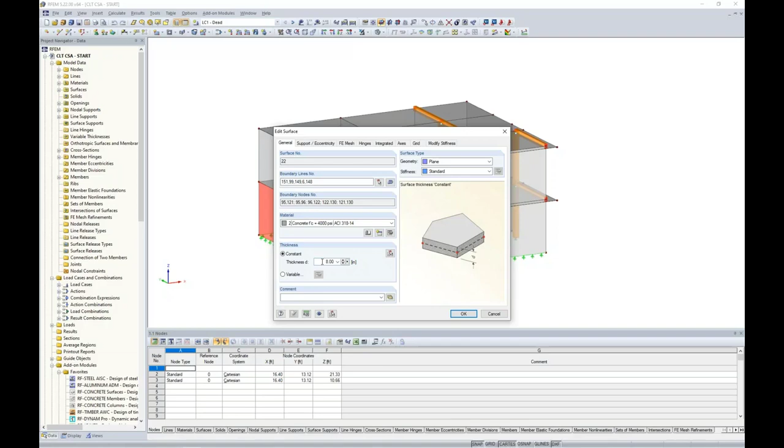If we click on any one of these panels, you'll see here that the material was defined with concrete. With the process of modeling a CLT structure within the main program first, we just need a simple placeholder for all of these panels. Concrete, wood, steel - it doesn't matter, as well as the thickness doesn't matter, because eventually within the RF-LAMINATE add-on module, we're going to override this material with our true CLT composition details. So for now, we just have our placeholder here of concrete.

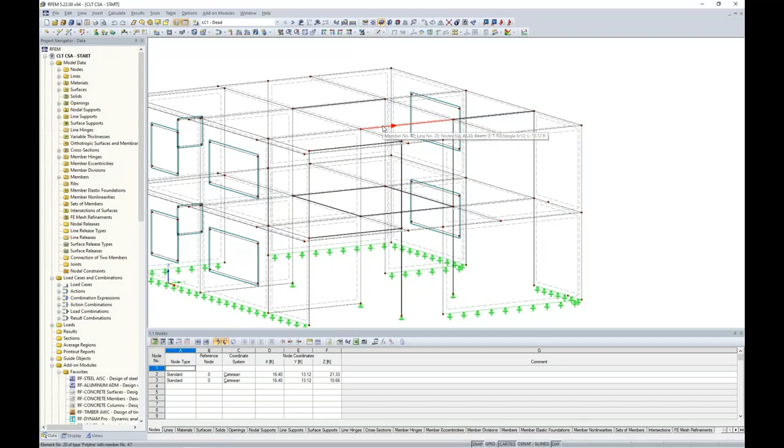You'll also notice that I have some beam members within the program as well as columns. These are just typical glulam members. For example, we have these beams here that will be holding up certain portions of our CLT ceiling up at the roof. What you'll find when we turn this into wireframe view is that 1D members are represented by 1D line elements. Inevitably when we turn this into the rendered version here, you can see that the center line of the beams lines up with the center lines of the CLT panels, when in fact we'd actually like to drop these glulam beams below the CLT panels.

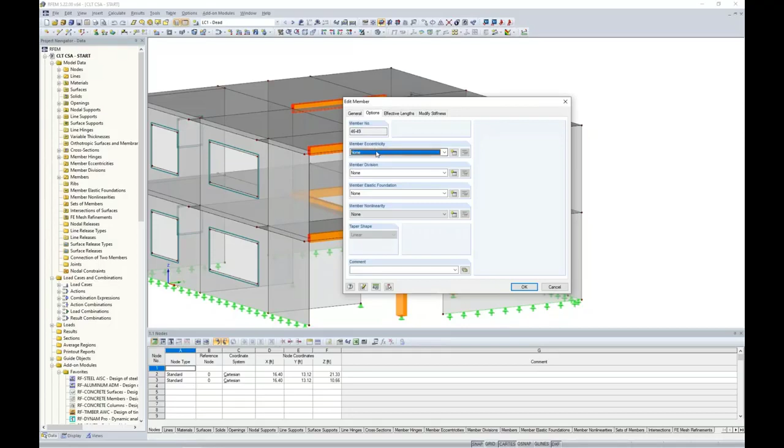We can do this by applying a new eccentricity. How I can do this is to select all of these members at my roof level. We can right click to edit the member. Under the second tab here, I have options where I can define a new member eccentricity. I could go ahead and manually type in the eccentricity distance. I'd like to drop this beam below the panel by considering half the depth of the beam as well as half the thickness of the panel.

But the problem is that if we make any changes to the panel thickness or the size of the beam, I'll have to go in here and manually adjust that eccentricity distance again. So rather, it's useful to use this automatic option here where we can line up the top of the member and offset it from the bottom point of a surface. So I can choose the top of the beam, and I can graphically choose any surface at my roof level - we'll choose surface number 63, and I'll choose the bottom point of that surface. Now when I click OK through these dialog boxes, you can see those beams now drop below the panels.

Now the benefit of this is that when we go in and we adjust the true CLT properties, the thickness will be changed from what we currently have modeled, but that eccentricity distance will automatically be adjusted.

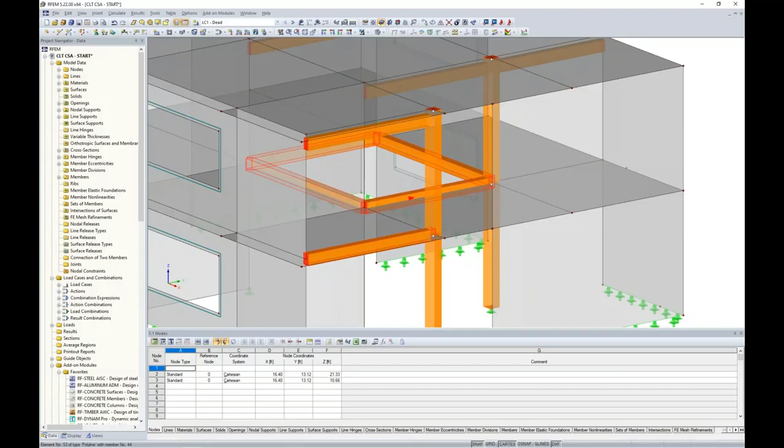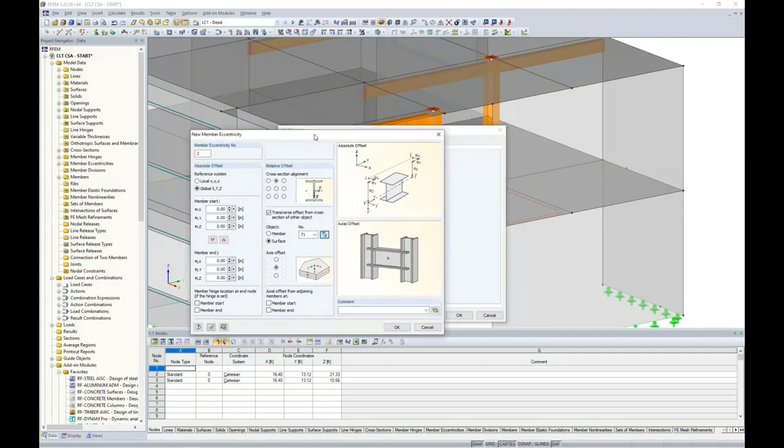Now we want to do the same thing at the first level. I'm going to hold down my control key to highlight all my beam members at this level, and double click to activate this edit member dialog box. We create a new member eccentricity, taking the top point of the beam and offsetting it from a surface, but this time choosing a surface at this first level, surface number 71. We choose the bottom point of that surface, click OK, and now you can see those beams were dropped below those panels as well.

Okay, so essentially the basic geometry is complete.

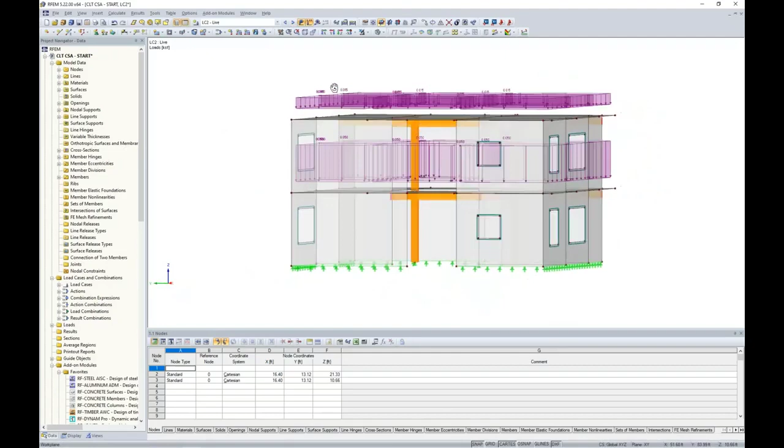I did want to show that I have applied a few loads to the structure. You can see here my dead load, if we activate the loads graphically, just simple surface loads on both the roof and the first level. We can take a look at live load, exact same concept, maybe just adjusted magnitudes. A snow load, which is just activated on the roof level, and then a simple lateral load for wind, applied in the global Y direction here.

So when you first create a model, I'm going to reactivate this dialog box by right-clicking on my model name and going to General Data. When we first create the model, or go back into it as I just showed you, the load combinations will automatically be created according to the standard selected within this drop-down box. So you can see here the NBC 2015 was selected. We also have ASCE 7 2016, as well as many other international codes, including the Eurocode. When this checkbox is checked, those load combinations will automatically be considered by the standard selected within this dropdown. If we uncheck this, we can manually create our load combinations and this standard will be ignored.

So taking advantage of the NBC 2015 for today, I can launch my load cases and combinations dialog box, and once again we can see our simple load cases defined here. Under the combination expressions, the program automatically generates my strength load combinations per the NBC 2015, as well as my serviceability load combinations. If I'm curious to see what those are according to the standard, I can click my info button here to see the load combinations directly from the code.

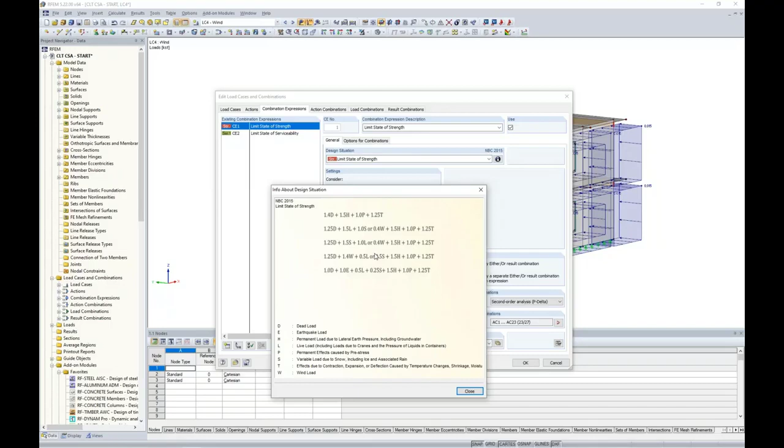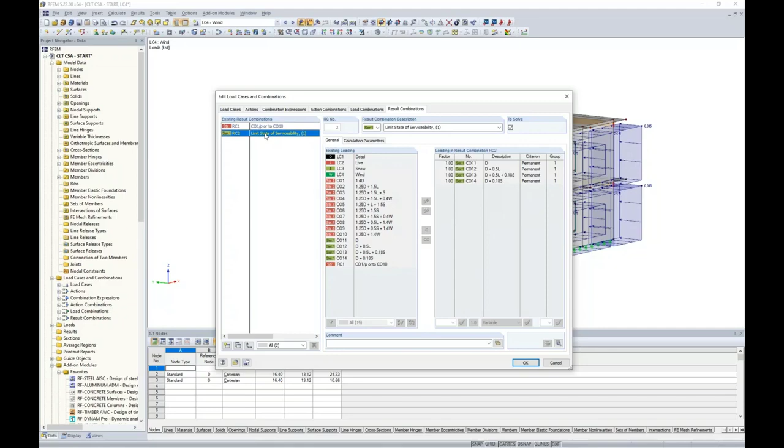Now, most importantly might be the load combinations tab, where we can see these load combinations listed out individually for strength as well as serviceability. This is based only on the load cases I've defined under that first tab, which includes dead, live, snow, and wind. Now, all load combinations are calculated according to a second order analysis by default, considering both result combinations here, and that would be available on the next tab. A result combination is nothing more than an envelope solution. So it will consider all of the strength load combinations here on the right-hand side and give us the max and min for deflections, internal forces, support reactions. Same thing with the serviceability result combination as well.

So now that we have those load combinations defined, we can view them here graphically, which will include all the dead, live, wind, and snow load shown on the structure here.

And you would think that, okay, we must be fairly close to running an analysis, but remember we still have all of these concrete panels defined here rather than our true CLT panels.

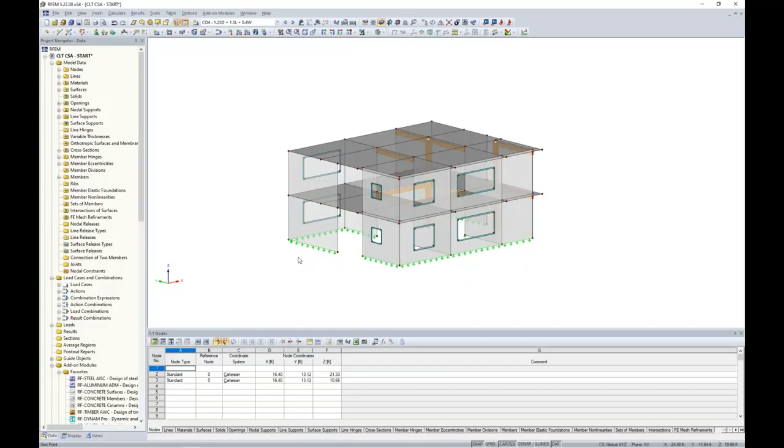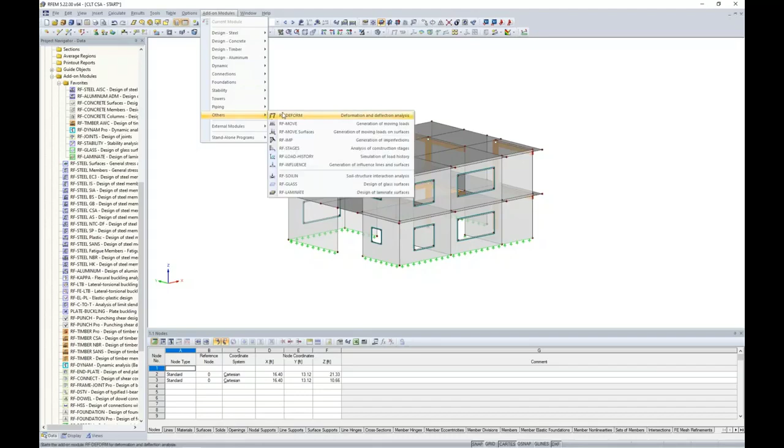So this is where we want to launch the add-on module RF-LAMINATE. The add-on modules can be found within the project navigator over here on the left, and you can see this long list of add-on modules. This is why we have the concept of only paying for the modules that you need, keeping the cost down for the software as well as catering to your specific projects. So we can launch RF-LAMINATE here. The add-on modules are also available within this drop-down box at the top, and we can find RF-LAMINATE under Others. So when I say add-on module, it's nothing more than just this simple dialog box that pops up within our main program RFEM here.

So let us jump back to the PowerPoint to discuss exactly how this add-on module is working with our main program RFEM.

Pretty soon we will go ahead and define the individual layers for our CLT compositions. Each individual layer has its own stiffness matrix based on the modulus of elasticity and the shear modulus, and we can see a simple example of a single layer stiffness matrix here.

So what this add-on module is going to do for us is consider all layers together to create a much more global stiffness matrix for the panel itself. You can see here an example of the D11 entry for a single panel.

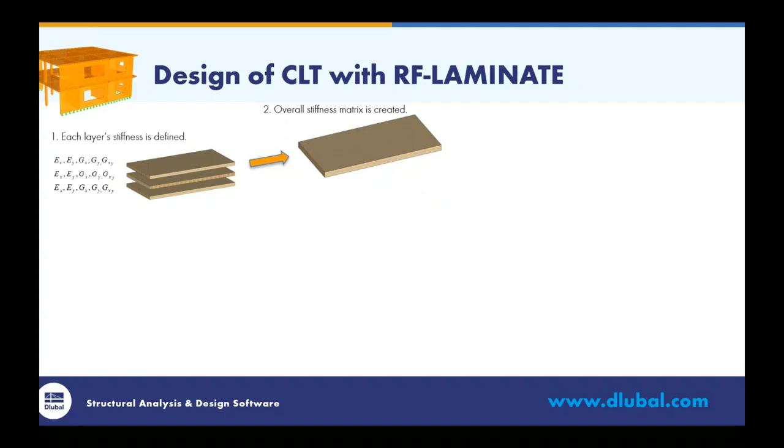Now we're going to take this overall stiffness matrix and export it back out to RFEM. So instead of seeing those concrete surfaces, we'll now see the true stiffness of these CLT compositions exported back out to the structure. We can run our analysis to determine the internal forces on these panels.

We're going to take these internal forces from the main program RFEM and bring them back into the add-on module, RF-LAMINATE. The stresses are going to be distributed to each individual layer of the CLT composition, and a stress distribution for a cross-section of the panel might look something similar to this.

Even furthermore, when we take these stresses and distribute them to each layer, we're going to separate them into tension, compression, bending, shear, and even torsion components. We're going to check these stresses in comparison to the design strength set forth by the material, as well as taking into consideration the CSA standard, to eventually give us a stress design ratio.

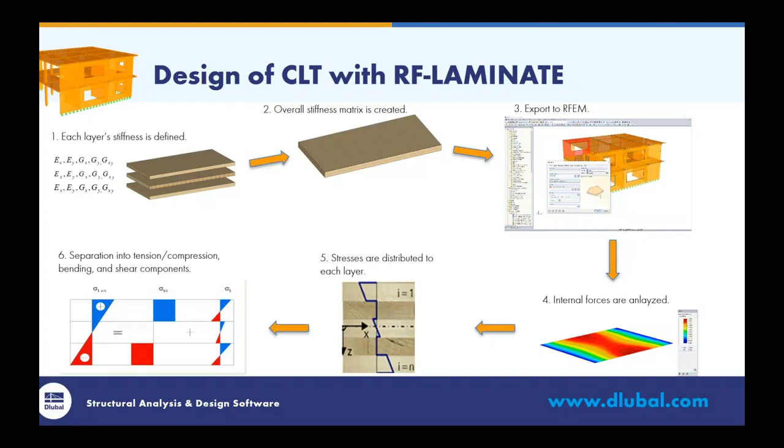So that's what's going on behind the scenes, and that's why we want to take advantage of this add-on module for CLT. The first thing to do within this add-on module is choose our standard. You'll notice we've just added the CSA O86, so this is the standard we want to take advantage of within the module today. We also have the NDS, both 2018 and 2015, as well as European standards.

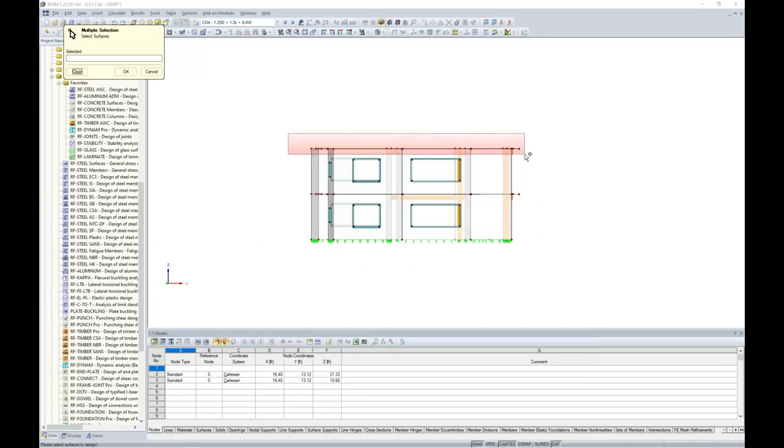We want to select the surfaces we're interested in designing. So for today, perhaps I'm only interested in the top roof panels, so I can graphically select those, as well as a few wall panels here. I'm not designing all of the surfaces, only these few that I've selected here.

As far as the ultimate limit state, I want to choose all of my strength load combinations and move them over to the right so they'll be considered for design. Then I have my serviceability limit state, where I'm going to choose my serviceability load combinations from the NBC 2015 and move them over to the right-hand side.

Keep in mind, all this information for our load combinations was brought in from the main program RFEM. I don't need to redefine any of this. Then we simply move down the list over here on the left.

So the next table here is our material characteristics for our CLT compositions. I want to rename our first composition to floors.

Now what I can also do is select the surfaces I would like to assign this composition to. Remember, everything is defined as concrete right now in our main program. So for our floors, maybe we select the roof panels, and we also select the first level here. Now this composition will be assigned to all of these surfaces listed here.

We also have the ability, if you'd like, to change the color. By default the color is blue, but maybe we want to change it to more of a wood color. We can change that here, including the texture.

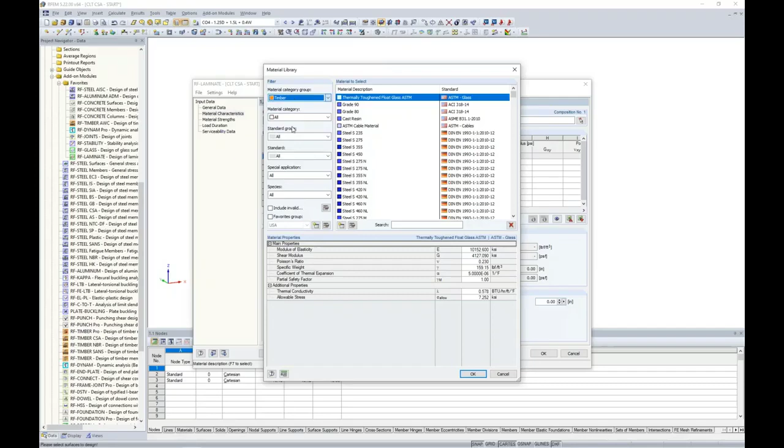Over on the left, I can filter to timber, filter to wood North America, and underneath this we have both the AWC and the CSA. So all materials are available from the CSA standard. If we choose any arbitrary material, we can see the material properties presented to us here.

We click OK and give our first layer a thickness, so maybe 1.5 inches, and the first direction would be 0 degrees. You can see all the material properties are also listed within this table. Our second layer would be defined in a similar manner. We can choose that same material if we'd like, keep the same thickness, but this time the second layer would be oriented at 90 degrees.

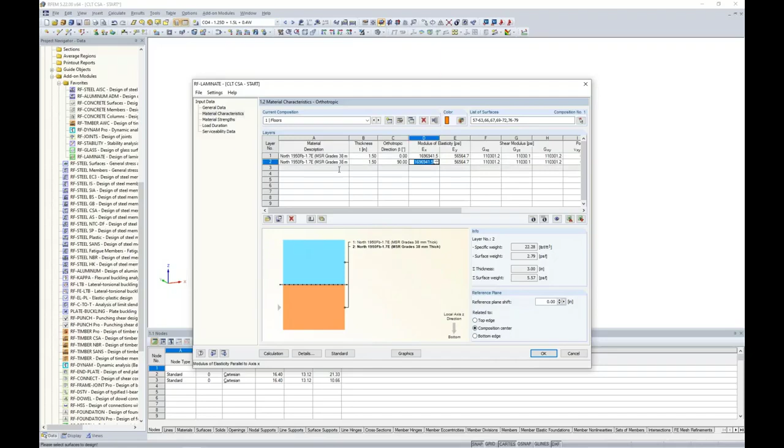This is relative to the local x-axis, which we'll get into later. Once you create your custom layups, you have the ability to save them into the library and open them up for a future model.

We also have the ability to take advantage of imported layers from our library. When I activate this option, the producer dropdown has quite a few producers available, including many European producers specific to North America, like Nordic Structures, Smart Lam, Structurlam, and today the PRG 320, which we can utilize for Canada as an example.

Then we choose the type, grade E1, and the thickness, which we'll select as 105 millimeters today. We have our 3 layers generated automatically. When I click OK, the materials, thicknesses, and orientation are automatically brought into this table based on that specific producer.

The other thing we need to discuss before moving on is the composition details, which we can find with this dialog box. This is actually fairly important for the analysis, in order to get accurate results based on the materials and products you're using.

You'll see a few different options here: consider coupling, CLT without glue at the narrow sides, as well as shear failure, which relates to torsion design. Then we also have these stiffness reduction factors.

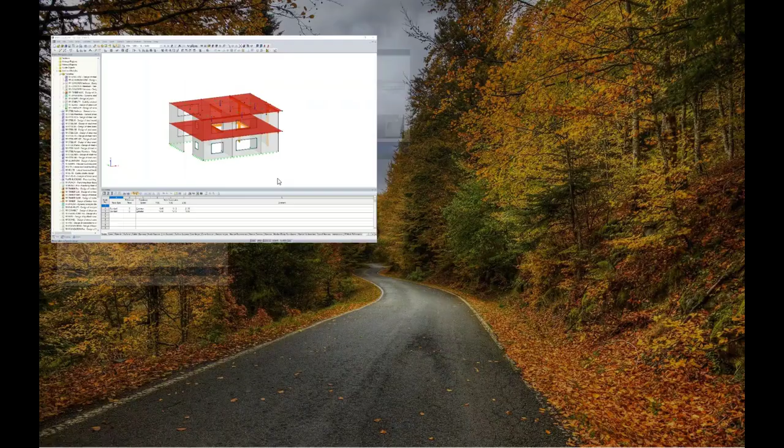I'm going to go back to the PowerPoint to explain this in a little bit more detail.

The first option, consider coupling, is automatically checked by default. On the left, when coupling is turned on, we're assuming glue at the top and bottom of each individual layer, essentially coupling each layer to the others. Looking at the stress distribution for normal and shear stresses, we see a common relationship across all layers. If we uncheck this option, we assume there is no glue coupling the layers together, and we see independent behavior for each layer.

The second option here is cross-laminated timber without glue at the narrow side. This is fairly common with most manufacturers, so you'll likely end up checking this box on, which assumes we do not have glue at the narrow side.

If we look at an exaggerated cross-section of a CLT panel, each layer includes individual board elements. With this checkbox turned on, we assume there is no glue between the narrow sides of adjacent boards. Therefore, we automatically set the modulus of elasticity in the local y direction of the panel equal to 0, so we do not have any stiffness in that direction.

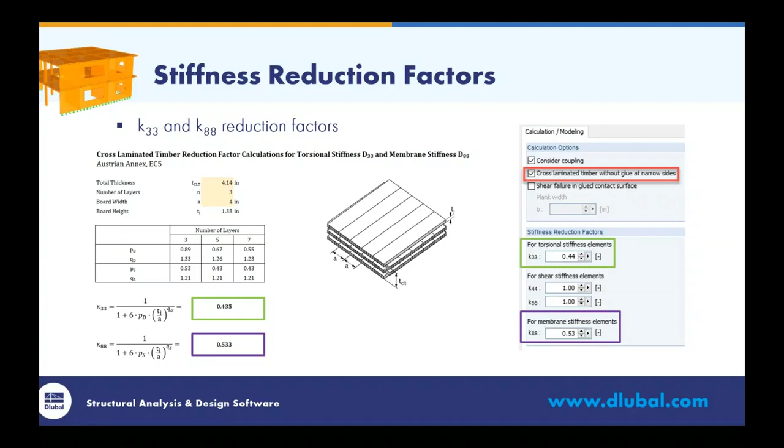Some manufacturers implemented into the program have already given us this information, so you'll see that reflected if it's available. If not, it's something you may want to consider inputting manually.

The third check here is for torsion considerations: shear failure in the glued contact surface. This is mainly for wall elements loaded in plane. For a floor element we're not so concerned with torsion, but for a wall element, we certainly could be.

This torsion check is only available when we do not have glue at the narrow sides. It is recommended to set the FE mesh of your wall elements, or whichever panels you're checking for torsion, approximately equal to the board width.

The NDS as well as the CSA standard do not give any information related to torsion for CLT design, so we're referencing the EC5 for these interaction equations. You can see the interaction equations displayed at the bottom, made up of three terms. The first terms can be viewed on the top right. The second terms can be viewed at the bottom. The third terms are simply the shear stresses, taken from the internal analysis from the RFEM model.

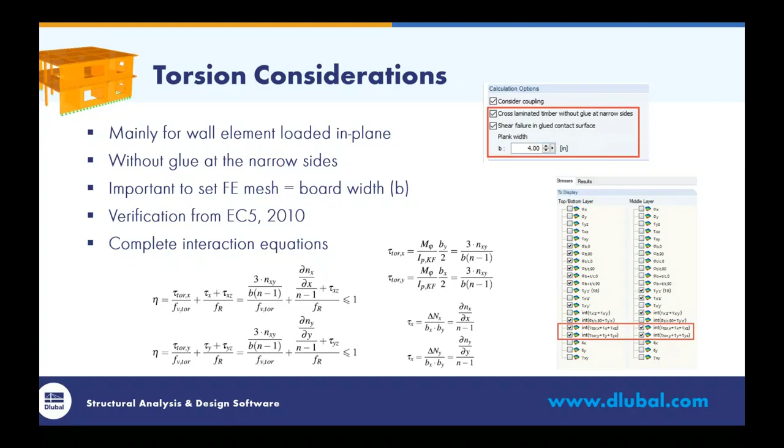Torsion is not turned on by default within the add-on module. I'll show you a quick screenshot back in RF-LAMINATE of exactly which stresses we can turn on and off. Torsion is not one of them, so you want to go in and activate this. You can imagine that if we turned on all of these different stresses, it would be overwhelming, so by default we leave the stresses we've determined are most important for design activated. We'll do that in just a minute.

Going back to the add-on module, we're working on our floor elements. We do not have glue at the narrow sides, but I'm not so concerned with torsion, so we'll turn that off. According to the Excel document I showed you and the EC5 equations, we will reduce K33 to 0.435, and I will reduce K88 by 0.533, and I can click OK.

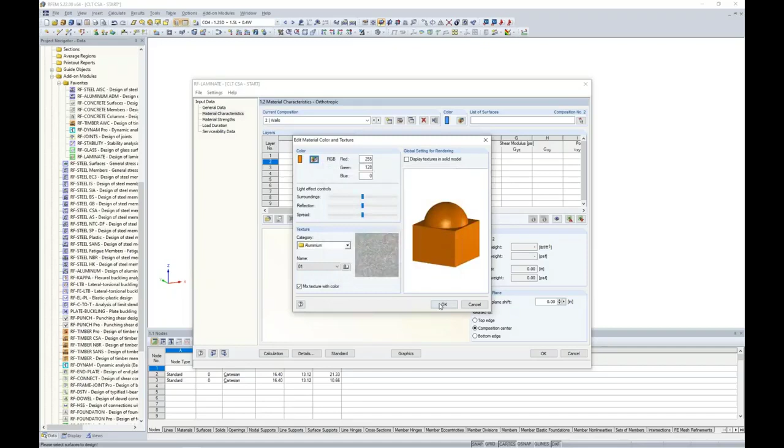That defines our first composition for our floors, but now we need to create a second composition within this same table. This time we'll call this one walls. Maybe we want to quickly change the color here to something more like timber, and I can choose my surfaces by graphically selecting all of my wall elements. I click OK, and all of the numbers are automatically populated.

I'm going to import my layers once again from the library, and you may want to adjust the type, grade, and thickness for your walls, but in our particular case today we'll use the same type and thickness from our floor elements. I click OK, and my layers are automatically populated.

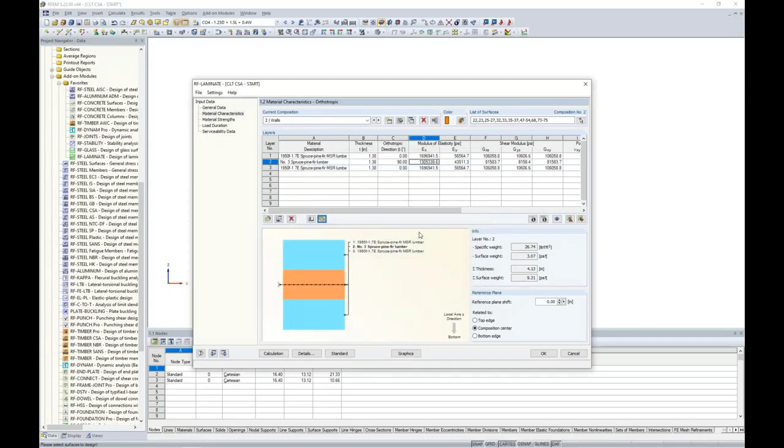I want to go into my composition details again because what we have set as default is not applicable from the manufacturer I want to use. I want to activate that there is no glue at the narrow sides, and I also want to activate my torsion checks. In this case, I want to put in a plank width of 4 inches. I'll once again reduce K33 to 0.435, and K88 will be reduced by 0.533, and I can click OK.

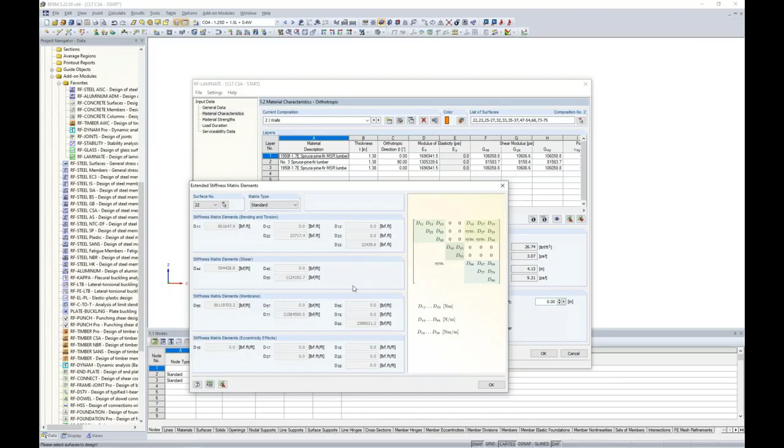Just like I mentioned in the PowerPoint, if we click our cursor within one of these layers, we can view the individual stiffness matrix for that layer. Right next to that, we can view the global stiffness matrix for this composition. You can see the numbers already input here for the entire stiffness matrix, and this is the information that's going to be exported back out to RFEM.

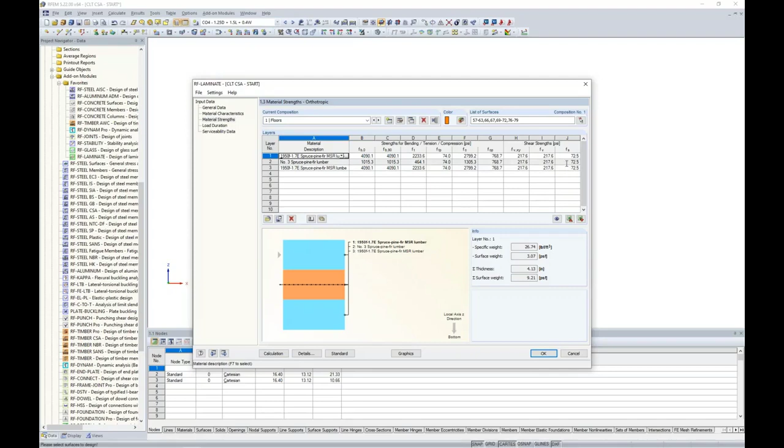On our next table, material strength, we're currently looking at our walls, and we can see the available strengths for bending, tension, compression, shear, as well as torsion. When I change this to my floors, same thing - I have bending, tension, compression, shear, but you'll notice I do not have an available strength for torsion because we are not checking that for our floor elements.

These numbers are simply based on the material strengths given to us from the manufacturer, but because we've selected the CSA standard, we're also going to apply those modification factors directly from the code. So you might wonder which modification factors are exactly being applied. Under the standard button, we can view this general tab to see exactly which modification factors are effective with these strength designs. Specific to the CSA, we'll see the load duration factor, resistance factors, and an additional modification factor, K mod.

So what I'm going to do is jump to the PowerPoint and go ahead and explain in a little more detail about these modification factors.

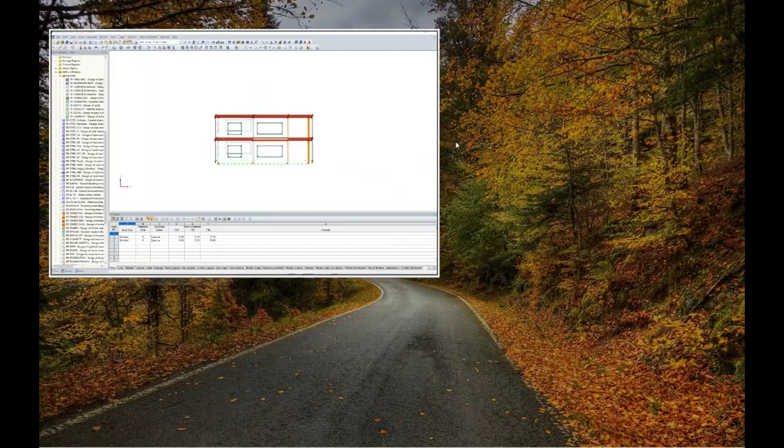Within the CSA standard, the O86, there are quite a few modification factors available. But what we have done is actually simplified quite a few of these within the RF-LAMINATE module, and there is a reason for this. For example, the system factor, KH.

The code tells us in Chapter 8 that this should be set to 1.0 for all strengths. The service condition factor, the code specifically states that CLT should be used only in dry service conditions, so we're going to make the assumption that K sub S is equal to 1.0. Treatment factor, we assume the CLT is untreated.

Now, the other three factors here are a little bit different: the CLT bending moment factor, size factor, slenderness factor. So the CSA standard really takes an approach for CLT design as though it's treating it like a member, and this might be extremely beneficial for hand calculations, just to simply run a design check.

The problem with that is, in a finite element analysis software, 2D surfaces are truly surfaces. We do not treat them as members. So for example, the bending moment factor, we have no differentiation between the strong and weak axis for a 2D surface, so we cannot apply this factor.

Size factor, slenderness factor, again, these are specific to members. We cannot apply them in the module to 2D surfaces. We don't do buckling checks, for example, where we determine what the member length is, so to speak, or what the dimensions are.

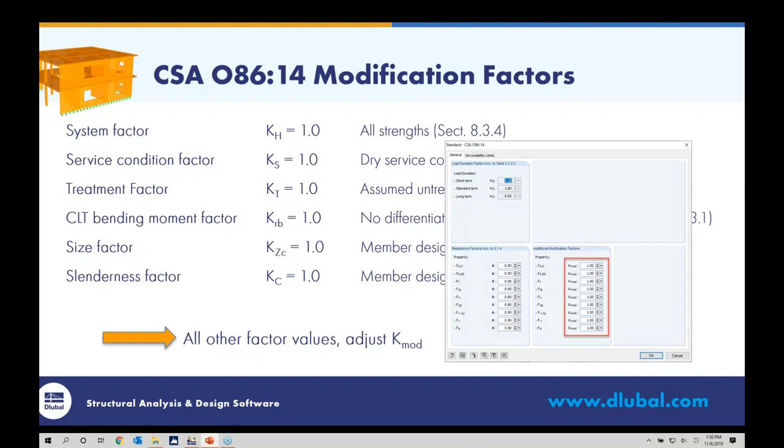So we can go back to the RFEM model here and into RF-LAMINATE. You can see K mod available to us here if we want to make those changes. Now for today, I won't be doing that, but I did want to point that out.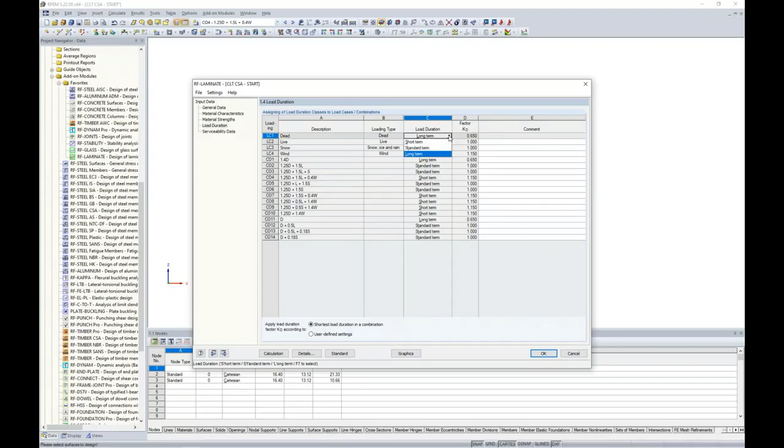The load duration shows us the load duration factors. We have some defaults set here, but you can use this drop-down box if you want to make changes to the load duration factor. Now finally, we have serviceability data.

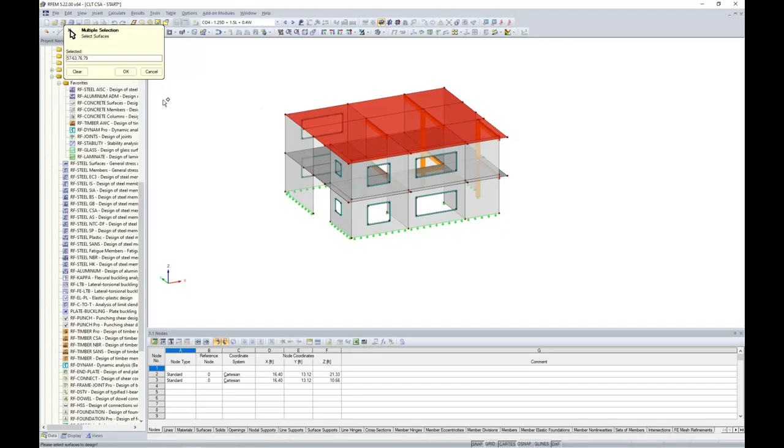So this is our deflection checks. If we are only interested in deflection for our floor panels and not our wall elements, all I need to do is graphically select those floor panels within the model. I click OK. Now notice that the reference length is available in the drop-down box here as the minimum boundary line, the maximum boundary line, or it can be user defined.

So in this case, we'll use the maximum boundary line. Is it a cantilever? And what is the deformation relative to? Is it the absolute or relative deflection? For a little bit of information on these drop-down options, you can refer to this picture down here, which explains it in a little bit more detail.

So we might be curious to know, well, what exactly is the limiting deflection ratio? That is controlled under the standard options. Once again, you can find it under serviceability limits. And depending on the design situation, whether that's live, permanent, or total, we have our limiting deflection ratios that we can set.

Now, these design situations are controlled, if you remember way back when, under the General Data tab, we moved the serviceability load combinations over here to the right. Well, you can see that within these load combinations, we can set whether this is live, permanent, or total. So maybe for our design situation today, we will set all of our load combinations for serviceability to permanent. So now our limiting deflection ratio will be L/360.

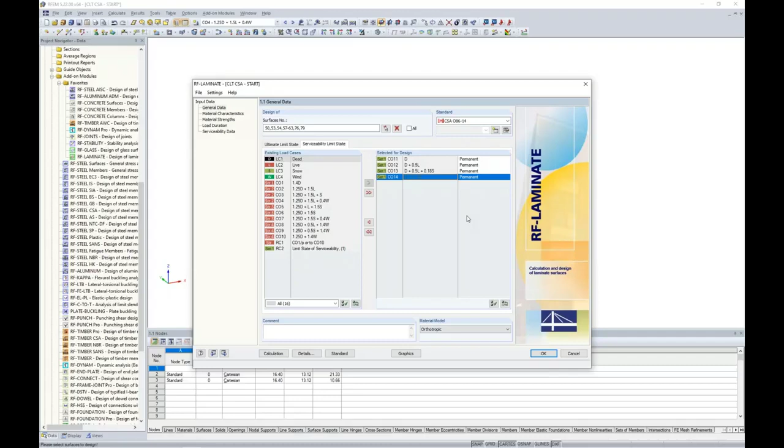So when I click OK and go back to the RFEM model, you'll notice here that my structure is no longer gray for concrete, but rather we have these timber colors because we have exported out the true CLT properties. And if I double click on one of these panels, I can see the stiffness is now set to laminate. The material is set to RF-LAMINATE, which is grayed out because all of that is controlled within the add-on module itself, including the thickness.

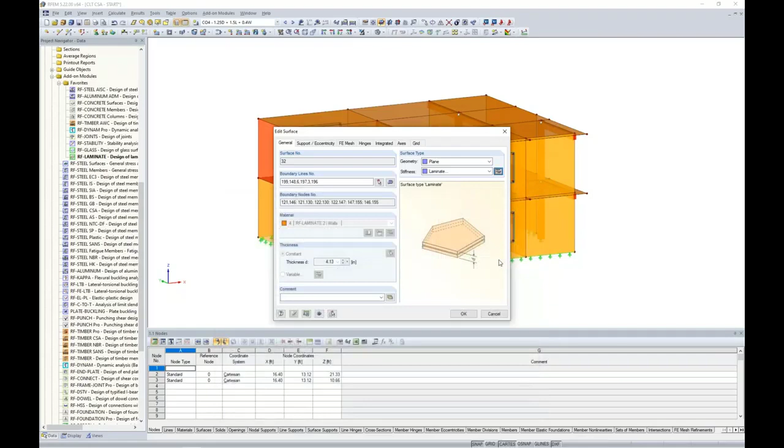We can even view that global stiffness matrix here within the details. Again, this is the exact same information that you would find within the RF-LAMINATE add-on module.

So we might almost be ready to run our analysis, but we have one problem: every joint within this model right now is a fully fixed connection. For any of us who have done CLT design or timber design in general, we know that's typically not the case, since these CLT panels will likely be joined together with screws. With a screw connection, maybe we want to release the moment completely and account for some type of slip with the screws as well.

The same goes for the connection of our members. If you remember at the beginning of the webinar, we dropped those glulam members below the CLT panels. We probably don't want to consider a fully fixed connection between the panel and the member. So what we want to do is begin addressing this by taking a look at line releases.

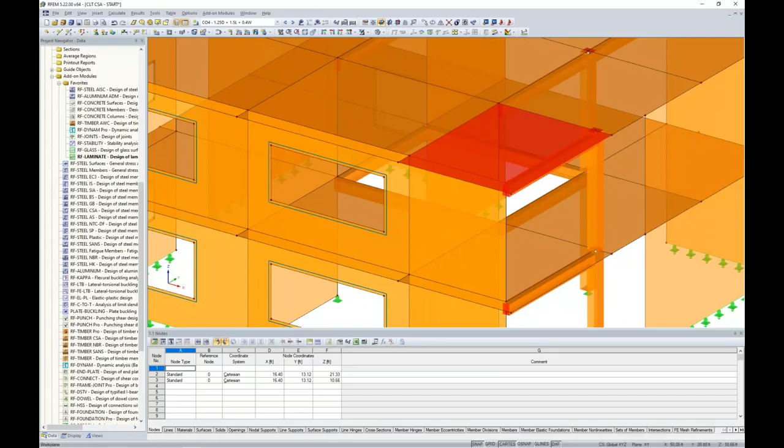What I'm going to do is highlight only my member here as well as my CLT panel at the roof level, and create a visibility by the selected objects. To create a new line release in the program, we can access this in our Project Navigator under the Data tab. You'll see here line releases. If I right-click, I can create a new line release.

The program asks me to choose the line this should be applied to. I can graphically choose this commonly shared line, line number 31, that both the panel and this beam member share. Then I need to create a new line release type. When we open up the line release type, we can activate the release of the moment about the local x-axis.

Keep in mind that the X, Y, and Z notations here refer to the local axes of the line itself—these are not the local axes of the panel, nor are they the local axes of the member itself. So we can also activate the slip along the line length of X, and rather than completely releasing the translation about the line length X, we can type in a spring constant here of 50 kips per foot.

We also want to show you that nonlinearities are available. This might be applicable in the Z direction. For example, if we have a downward deflection of our panel onto our beam, we can set this so that it is fixed if positive uz. So if we have a downward deflection in the uz direction, we'll see this connection fully fixed. In turn, if we have an upward deflection of the panel, we would see a fully released connection between both our beam and our panel.

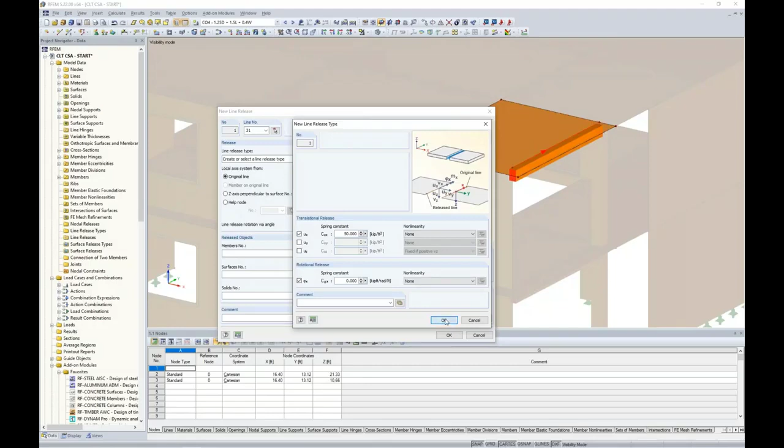That's one advantage you can take of the nonlinearities of line releases. We won't be doing that today, so we can uncheck this option, but instead we want to apply the slip of the screws as well as the rotational release for our moment. We click OK. Now I just need to define my surface that this should be released with, and I can graphically choose surface number 63. I click OK, and I should see a line release symbol here shown back in RFEM—so now that line release is applied between the member element and the panel.

Exiting out of this visibility mode, we actually need to apply these line releases to all members and surfaces within the model. Another quick example would be this member over here on the right-hand side. I'm going to right-click to create a new line release, and graphically select line number 20, which is a commonly shared line between this member. The line release type is already set, so I don't need to redefine that.

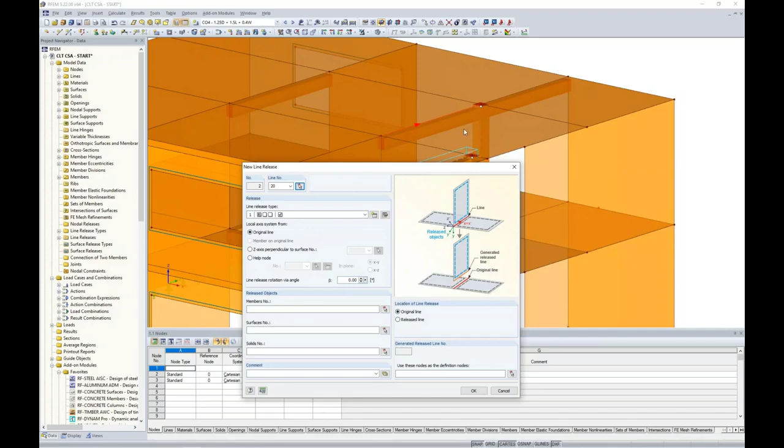What's interesting is that this member shares two different panels. So what we can do is select two surfaces—we'll select the surface on the right as well as the surface on the left to be released from that member. I click OK, and there is my second line release. We'd want to continue doing so for all the rest of the members available within the model, and I'll show you that in just a minute.

But let's quickly move on to the connection of the joint between our CLT panels. Exact same considerations here—these are probably going to be connected with screws or some other type of connection where maybe we want to release a moment and account for the slip of the screws. So rather than moving forward with line releases, I actually want to utilize line hinges.

I think line releases can be incredibly powerful when it comes to beam to surface connections, but for surface to surface connections, it's a little bit easier to work with line hinges instead.

We can access line hinges over on the left, once again from the project navigator, but instead I'm going to go under Insert, Model Data, and you'll see line hinges, where we can assign to the lines graphically. We want to create a line hinge definition, similar to what we saw with line releases. We want to completely release the moment, and also activate a spring constant for the slip along the local axes of the line.

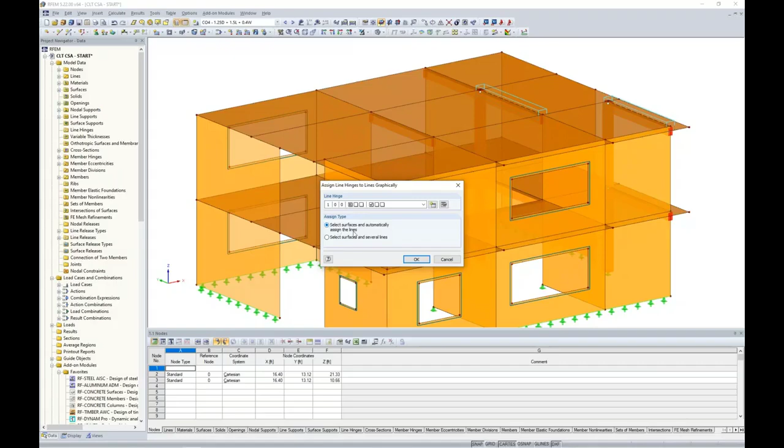The advantage of using assign to lines graphically is that I can select surfaces and automatically assign the lines. For example, if I take only my roof elements and click OK, you'll notice those line hinges were automatically applied to all of my roof panels, denoted by this symbol. Zooming in, the program even recognizes where it should not apply line hinges if it's not connecting to another CLT panel.

The problem is that with any FEA software, when we have a joint where two or more members are framing into it and all of them have a member end release, at least one member needs to be fully fixed. The exact same concept needs to be followed for 2D surfaces as well. If we have two or more surfaces framing in, we do not want to apply line hinges to the joint for all panels. We need to leave at least one fully fixed.

So there's a little bit of cleanup we'll have to do after we assign to all of the lines, including the location here with our center panel. We would graphically select these line hinges, holding down the control key, and hit delete on the keyboard. Now when we look at the panel-to-panel connection between the left and right panels, we only have one line hinge defined. If we compare that to a wall framing up into the roof panel, this wall is considered fully fixed, so we can leave at least just one single line hinge available here.

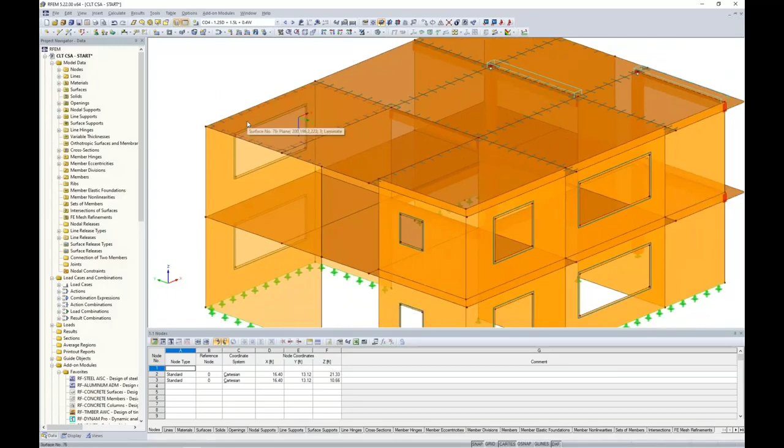What I went ahead and did with an already saved model, which we'll jump to, is apply all the line hinges and line releases for the entire model. You can see all my beam members have these line releases applied, and all of my CLT panels have the line hinges applied, leaving at least one panel fully fixed.

Okay, so that really covers the connection details of our CLT structure. The final thing to discuss before running the analysis is I'm going to launch RF-LAMINATE again.

Jumping back to material characteristics, remember we are orienting these different layers in relation to the local x-axis. The first layer is oriented 0 degrees from the x-axis, while the second layer is 90 degrees from the x-axis. This tells us that we have a strong orientation for each one of these panels, related to the local x-axis, because we have our two exterior layers oriented along that x-axis.

So what this means, if we're looking at our walls for example, is that these walls are going to take some pretty heavy gravity loads. Therefore, we want to orient the strong axes to take the gravity loads. This means the local x-axis needs to be in the vertical direction. If you do not take careful note to orient these panels correctly, then you're really not getting the full strength out of the panel, and it can lead to a much too conservative design.

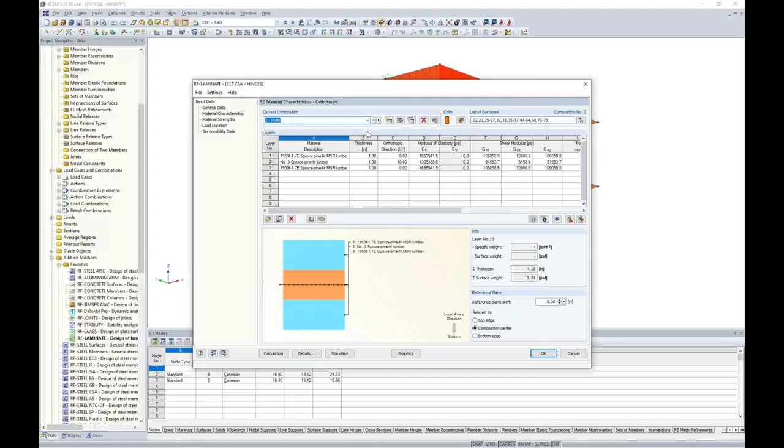Going back to the RFEM model, what we can do is activate only the wall elements by holding down the control key and selecting the vertical panels, creating a visibility by the selected objects. I can right click on any one of these surfaces to turn on the local axes. You'll notice that my first wall element up here on the right hand side has the local x-axis oriented in the vertical direction. That's exactly what we want to take those gravity loads.

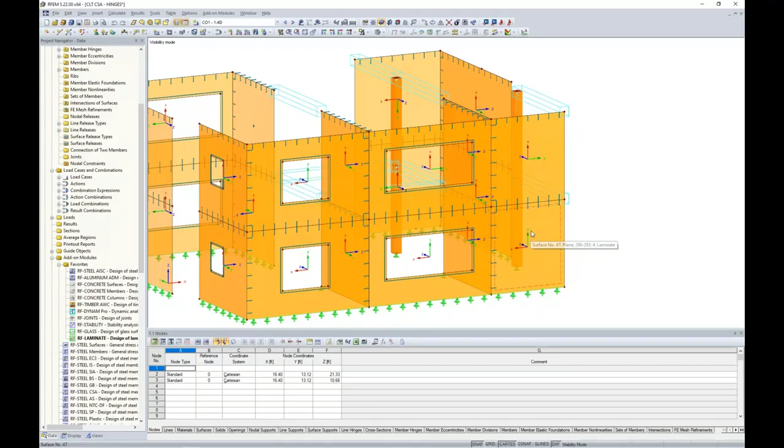But if we take a look at the panel right below it on this first level, the local y-axis is oriented in the vertical direction. That is not the strong orientation.

We need to make sure that we have all of these panels for our walls with the x-axis pointing up. So how can we effectively do that without having to individually rotate each panel or remodel? What I can do is highlight my selection box over all elements.

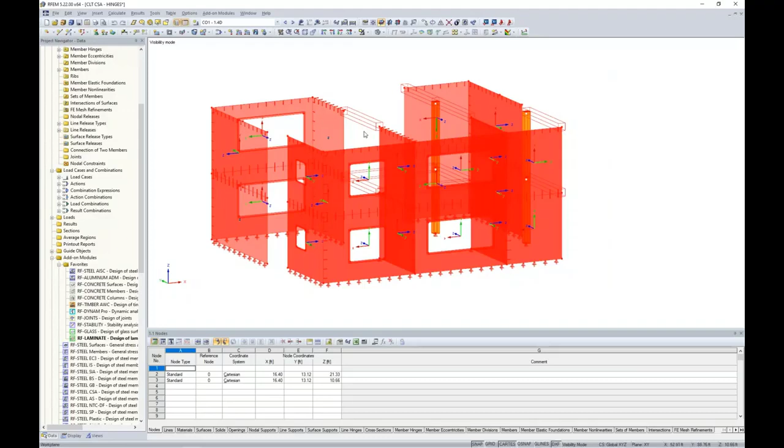I can double click to edit them, and here we have an axes tab. The axes tab allows us to orient the local x-axis parallel to a line in the model. So I can graphically select any vertical line, for example, line number 40. I click OK, and now every single wall element I selected has the x-axis parallel to line 40, which is in the vertical direction to take those gravity loads.

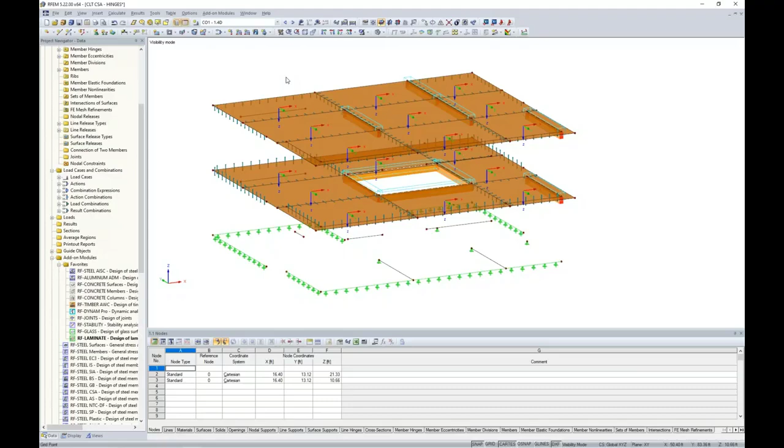Now this isn't just limited to walls, the same concept goes for floor panels as well. So if I inverse my visibility here to show only the floor panels, we want to make sure the x-axis is oriented in the longer span direction. You can see for my floor panels today, the x-axis is taking that longer span, so perhaps that's okay and we don't need to make any modifications. But if you did, you just follow the same procedure of selecting multiple surfaces at a time and orient them relative to a line selected graphically within the model.

We can right click to turn off those local axes, and we are now finally ready to run our calculation within RF-LAMINATE. I can run the calculation directly within the add-on module. Remember from the PowerPoint exactly what this is doing.

It's exporting out those global stiffnesses for our panels back out to RFEM. We're running all of the load cases and load combinations back within RFEM, and within that analysis we're going to pull those internal forces. We're going to bring them back into the add-on module, distribute the stresses to each individual layer, and then further separate them out into tension, compression, bending, shear, and torsion stresses.

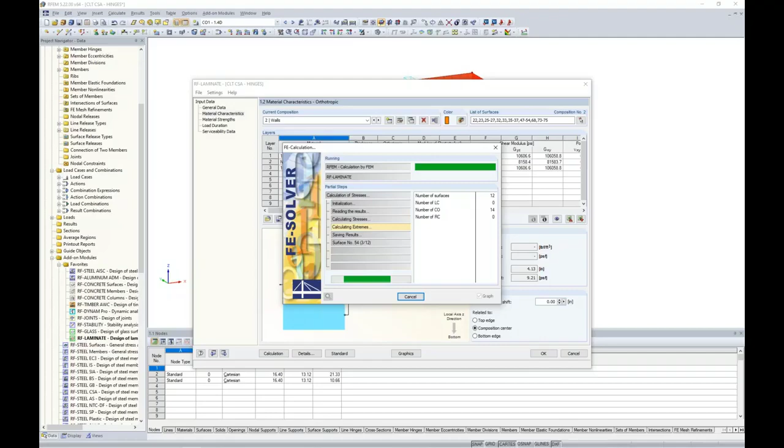So we are now presented with our results here in a table format. We can view the max stress ratio by loading, and the max stress ratio by surface, by composition. You'll notice too, if I pull down my add-on module here and click anywhere within this table, the program automatically syncs up exactly which surface I'm looking at within the table.

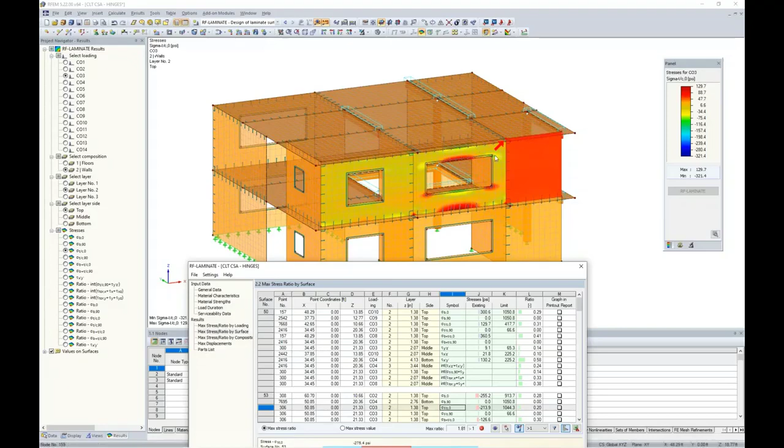Now, even more so, you can see there is a big red arrow here that points out exactly where the controlling force or stress is for that particular check. And within each surface, as I mentioned, we're going to be checking bending, tension, compression, combined interactions here, shear, as well as torsion for our walls, ultimately coming up with a design ratio.

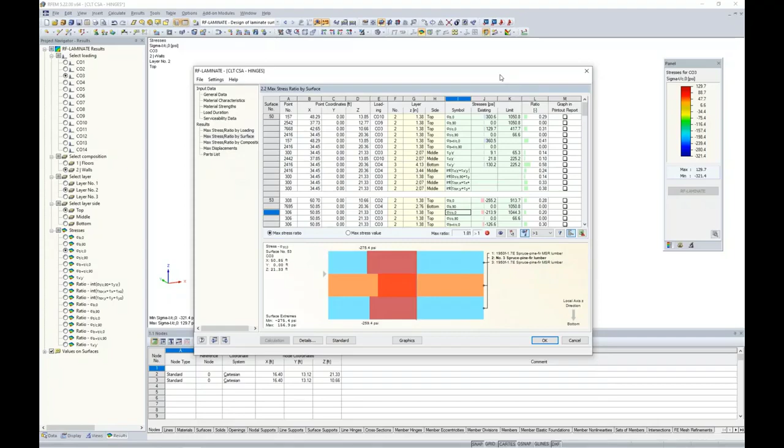We also have the max displacements here, so this is our serviceability checks. Remember, we are running in comparison the deflections to L over 360, and we will get a max ratio here as well. Now any of this information, whether it's for serviceability or strength design, it can be exported automatically to Microsoft Excel with the click of a button here.

So if we want to do a little bit further sorting, notice as well all the stress distributions are shown here within each layer that are automatically updated as we click within this table. We also have a parts list given to us, which is nothing more than a material takeoff.

Okay, so if we take a look at the max stress ratio by surface, I think we notice a pretty big problem. We have a max ratio of 1.81 with a big red sad face. That is because we are over the design ratio of 1.0.

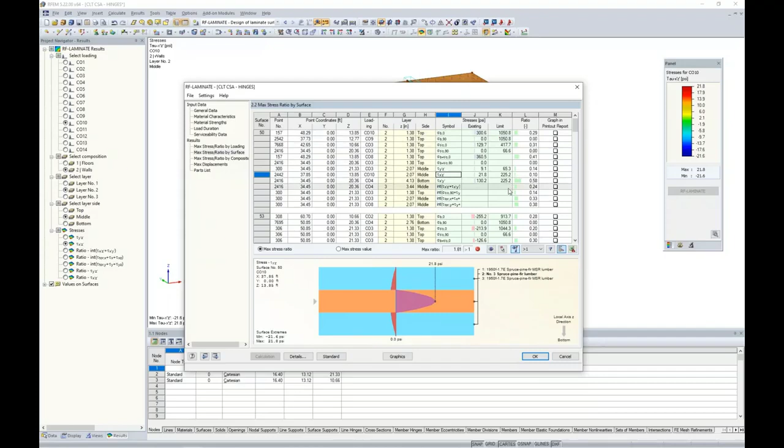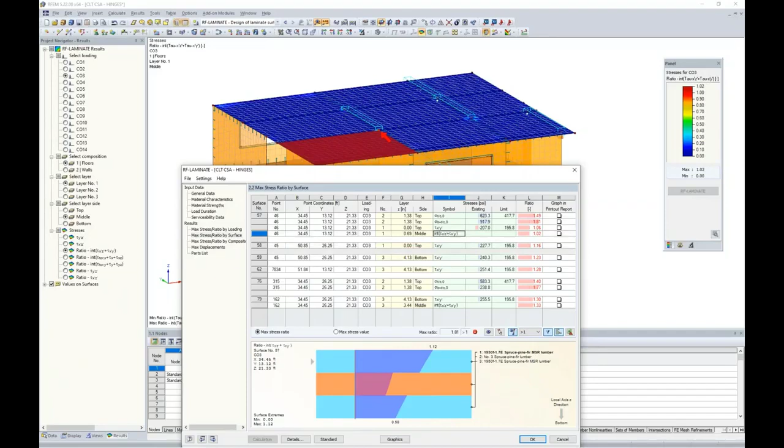So what exactly could be the problem here? Well, what is nice is that rather than filtering through this huge list of information within the table, I can use these filter options here to choose all of my max design ratios which are greater than 1.0. I click on the filter button here, and now I can see exactly where my problem areas are. You'll notice that as I'm clicking on these different high stress ratios, they seem to be occurring all at these corner locations here, and it appears that the rest of the panels really don't seem to have an issue. So this would probably flag me that this is some type of singularity issue.

So let's jump to the graphics view back in RFEM. Now we're currently looking at RF-LAMINATE here, so this is the result information for the add-on module shown graphically to us back in the main program RFEM. And you can see we can switch to different load combinations that we've run, and we could change the composition between floors and walls.

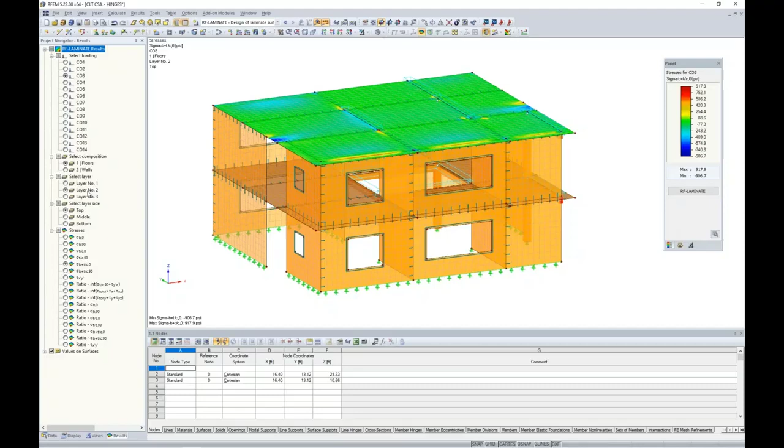We can select the layers, as well as view the individual stresses. I'm currently looking at my floors and the middle layer, and if we take a look at one of these checks here, we can turn on the ratio. This is one of the extremely high ratios, 1.81.

I can zoom in here, and like I said, the rest of the panels seem to be relatively okay, but we just have these extremely high stress peaks right here where maybe we have this beam member framing in underneath the panels, or where we have multiple wall segments kind of coming in together.

A singularity within any finite element program occurs where we just have high loads at a single FE mesh point, and it creates unrealistic peaks, and therefore we're getting high design ratios, and we might think we need to use a larger CLT composition. But in reality, that ends up over designing the structure simply because these high stresses really won't be experienced out in the field when this structure is actually constructed.

So how do we deal with it within finite element programs? That really comes down to the tools that you have available with the software that you're using. So I want to show you guys some advantages that we have directly within RFEM to deal with singularities.

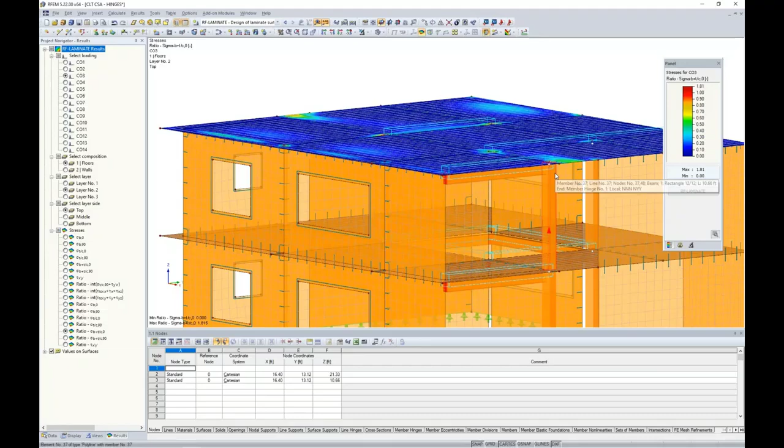Singularities might also be very common when we have a column such as this one framing directly into a CLT panel. Again, all of the stresses and forces are being transferred to the panel, or vice versa to the column, at a single FE mesh point, which just leads to no load distribution.

So what I'd like to do for the singularities is to take a look at the graphic view here of only my roof panels once again. I'm going to turn off my results, and we'll focus in on these two nodes here on either side of the beam. The first thing I want to do is to apply an FE mesh refinement.

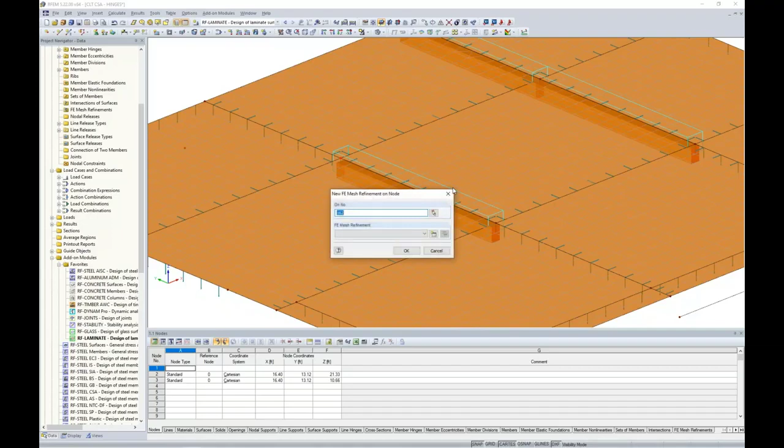So I can right click on the node, and I can go to New FE Mesh Refinement, and we create a new FE mesh refinement definition here. It already recognizes it's about a node. We'll give it a radius of 2 feet. The target FE length will be 0.2 on the inner diameter, as well as the outer diameter will be 0.5. We click OK.

Once we have defined this FE mesh refinement, you can see the FE mesh refinement symbol shown here. If I turn this into wireframe view and we go to calculate, generate FE mesh, you'll notice that my FE mesh is much smaller about this single node, and it transitions back into my global settings of 1 foot width FE mesh elements quite nicely.

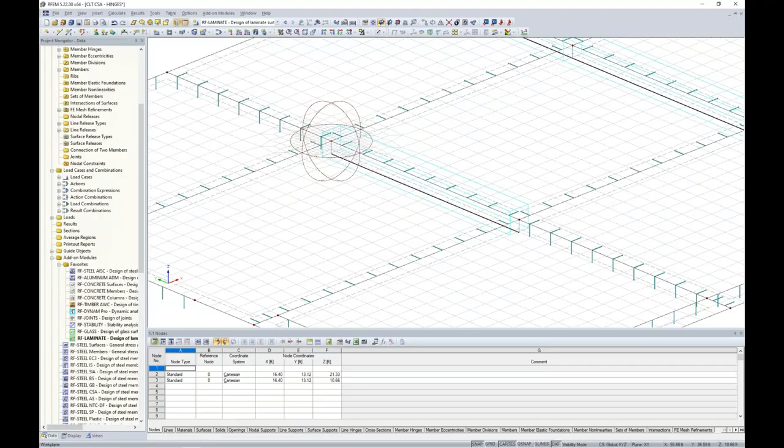So the advantage of this is not adding in a huge number of FE mesh elements. It's really going to slow down your calculation time, but rather just focusing in on this single location here about the node. Now we also can take FE mesh refinements.

We can hold down our control key and drag and drop them to different locations to make a copy. So now when I go to calculate, generate FE mesh, you can see that both of these nodes have the FE mesh refinements applied.

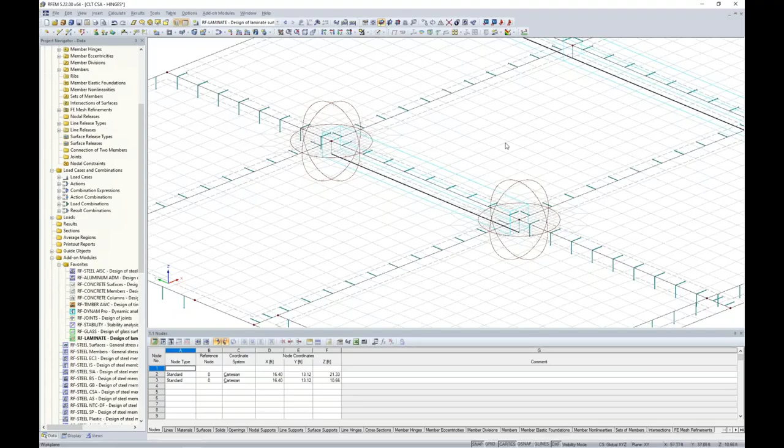Now this is not going to take care of our singularity problem, but what it is going to do is to make this high stress location available to us in a result in a much smaller location rather than us using the 1 foot width of the global FE mesh settings. So we're kind of isolating the issue into a smaller area.

So the second part to eliminating these singularities is to apply what's called an average region. Average regions are exactly as they sound, which we can access them here within our project navigator. Once again, we can right click to create a new average region. It's going to average out the internal forces over a set region that we define.

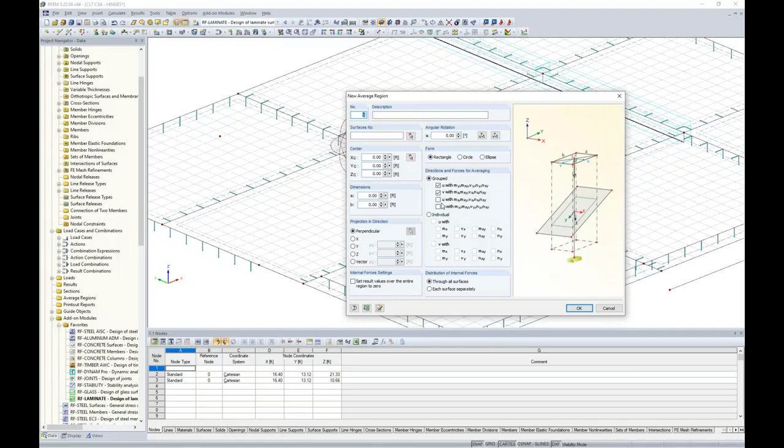The first thing I want to do is to select the surfaces this average region should be applied to. So I'll turn this back into a rendered view and we'll choose all 4 surfaces here that share this common node. I click OK. I want to apply the average region at this particular node. You'll notice that the node coordinates are updated. Then I need to give the average region dimensions.

A common question is, well, how big should I make my average region? That's really up to the engineer's discretion and your particular model. There really is no rule of thumb for how big an average region should be, but you should really look at it and make sure that the results make sense once you apply this average region, that we're getting realistic load distribution.

So for today, I'm going to use a dimension of 1.5 feet by 1.5 feet. I'm going to check all check boxes over here on the right. Now what this allows me to do is to average out all internal forces in all 4 directions over this average region dimensions. I can click OK, and now you can see we have the average region symbol shown to us graphically here within the model.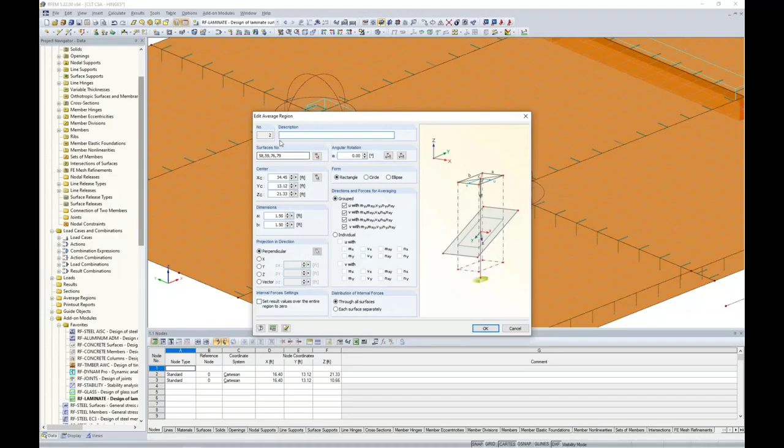Similar to FE mesh refinements, I can select the average region, hold down my control key, and drag and drop it to a different node. But keep in mind that we do need to double click to edit this average region and change the surfaces here that it's applied to. We don't want to apply it to the 4 surfaces on the left, but rather the 4 surfaces on the right for that average region, and I can click OK.

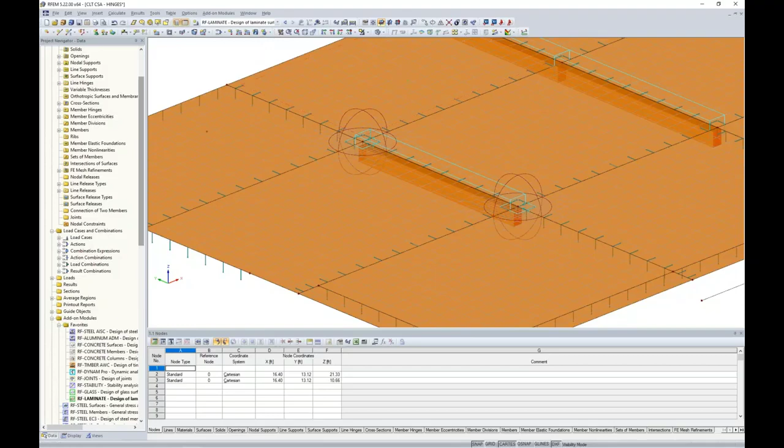So now you can see both the FE mesh refinement symbols as well as the average region symbols applied to the structure at these locations. So maybe jumping to just a simple load combination here, 1.4 dead load, let's quickly run a calculation and see how our average regions affect our results.

So once this is done calculating, I'm currently looking at my results here for this particular load combination. And I'm looking at my surface internal forces in the NY direction, so the axial forces in the local Y direction. And we can clearly see with these contours, how they are affected by this average region. Notice the magnitude here of my force is 3.75 kip per feet.

We have the ability over in the project navigator to turn off our average regions as well. Now notice that we went from 3.75 and we jumped clear up to 16.18 kip per feet. So you can see how the average regions will really smooth out those problem locations, and we get more realistic internal forces that are eventually used for our design within RF-LAMINATE.

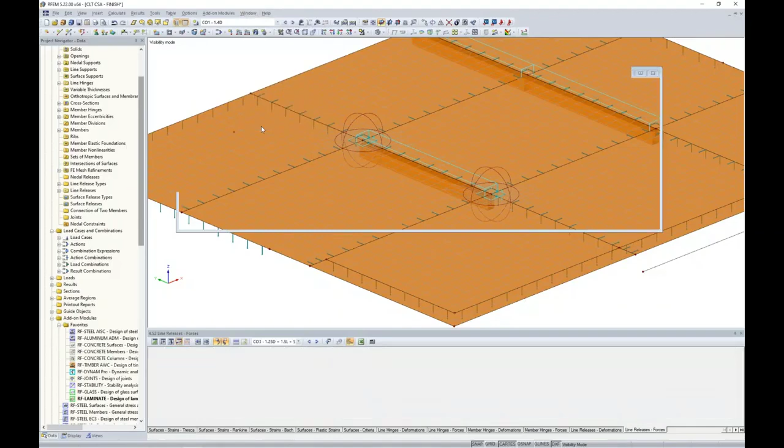So what we'd like to do then is to utilize these average regions as well as the FE mesh refinements for the entire model. So once again, jumping to an already saved model here, I went ahead and applied these average regions as well as FE mesh refinements to a lot of the different joints within the model that maybe I had some issue with. Now keep in mind, this is not necessary for every single joint within the model. You really only need to apply it where you appear to be having singularity issues. So I took the initiative here, applied it to many of the different joints just for completeness.

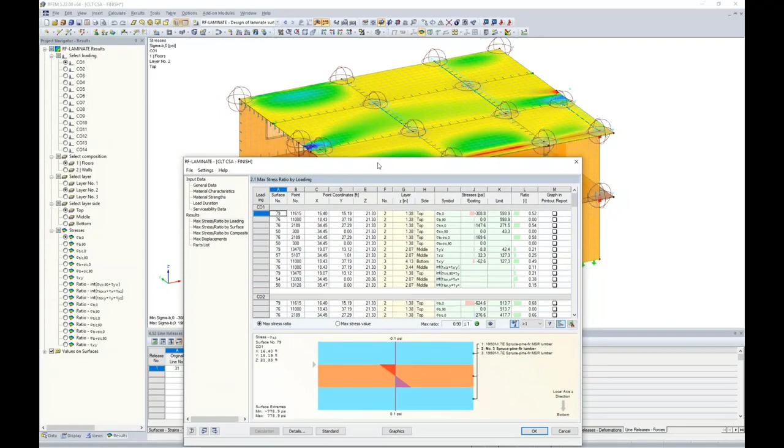And what we would do now after we have applied it to the entire model is to run the calculation with RF Laminate again. Now, you might apply all of these average regions, all of these FE mesh refinements, run your calculation, and find that your design ratio didn't change at all. And this is a two-part process.

The reason why is under the Details tab, we have to tell the program under the Results tab here to apply the smooth internal forces in the defined average regions. You have to turn this checkbox on, otherwise average regions are going to be completely ignored, and this is turned off by default. So once you've applied the average regions, come in here, check on this checkbox.

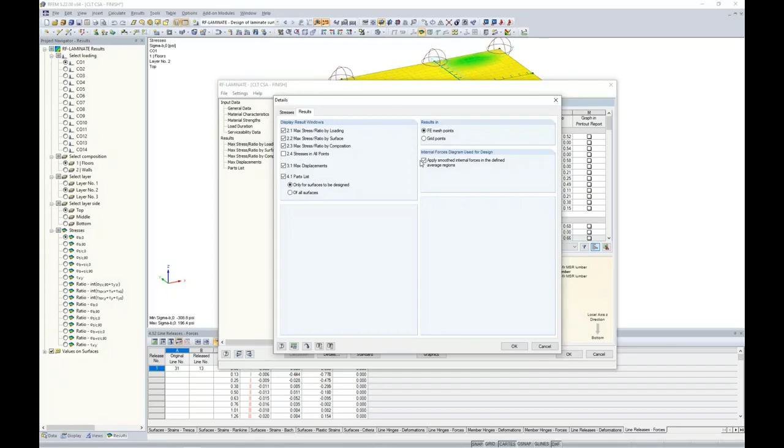You can run your calculation again, and now we take a look at our max design ratios, and we see a max check now of 0.9. So that was significantly reduced from 1.81 clear down to 0.9 just by applying average regions and those FE mesh refinements rather than increasing the thickness of our panels or decreasing loads. So that is how you essentially can deal with singularities with CLT design.

Okay, so going back to RFEM once again, there's just a couple other things I'd like to point out. When we look at any one of these other load combinations here, and we're currently looking at dead load, live load, snow load applied to the structure, keep in mind we also have the rest of our result information available to us within this Results tab. This includes for our members, we have the internal forces available to us.

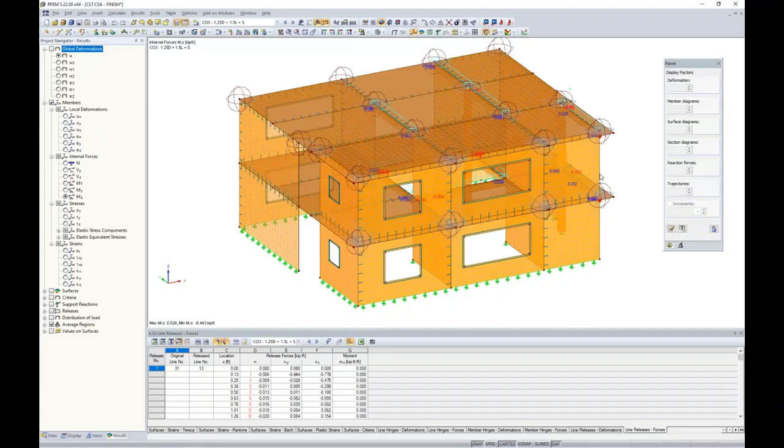So if we take a look at maybe this single column, I create a visibility by the selected objects. I can take a look at the axial forces or the normal forces within this member, shear forces in both the strong and weak axis direction, as well as bending moments. This is the information that we could either take into our own design tools to do member design, or you can take advantage of the RF Timber CSA or RF Timber AWC add-on modules to do member design all within one program.

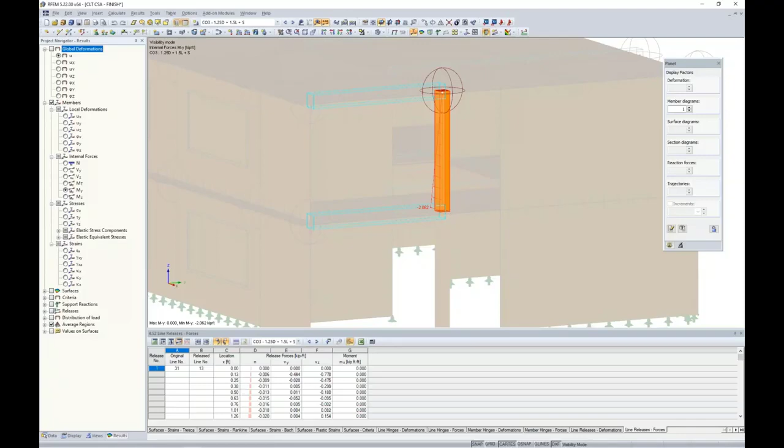This is also true for concrete design, steel design, aluminum. If you have multi-material elements within the same model, you can utilize some of the other add-on modules to do design as well. The other very interesting thing we have to deal with when it comes to CLT design is, of course, the connection design.

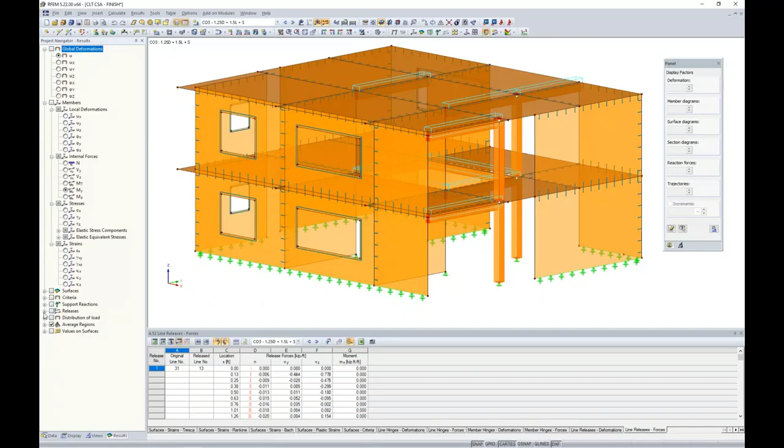Under the Display tab, I'm going to turn off the FE mesh refinements, and maybe turn off the FE mesh as well as the average regions just to make this easier to see. With the addition of line hinges and line releases, we now have the ability to expand our releases tree, and this is quite powerful.

If I make a selection here of just a few wall panels, and turn on the visibility by selected objects, with the addition of the line hinges, for example, we can actually view the local deformations graphically within the model of the line hinges itself.

Now, why this is powerful is because we also have the ability to view the internal forces. For example, the axial forces, we can view shear forces at those particular joints. We can also turn on the moment, but remember we released the moment, so we'd expect everything to be 0 here. For any of these line hinges, we can right-click and go to the results diagram to see in more detail exactly what's going on with these internal forces.

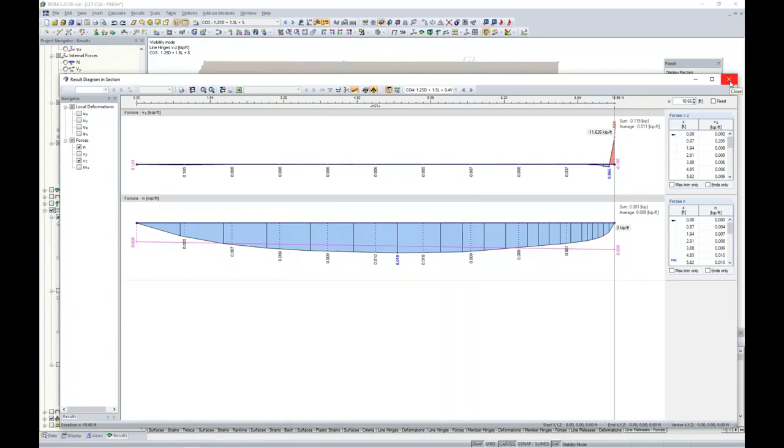We can change to different load combinations here if we're interested in viewing the results for those particular line hinges for different load combinations. So this is the information we'd probably want to export out to Microsoft Excel, for example, to do our connection design.

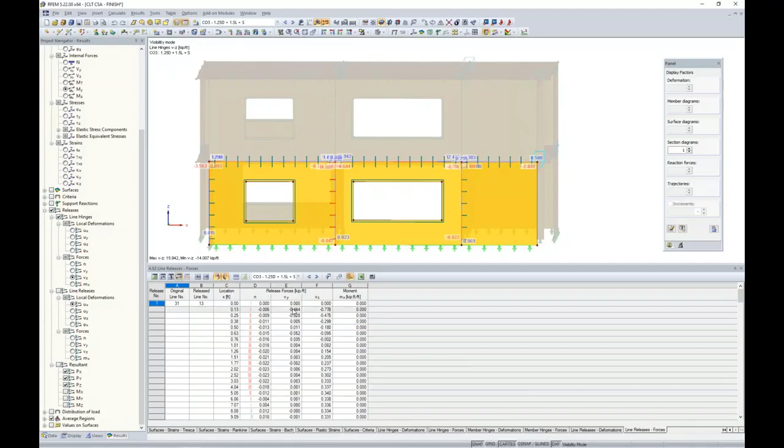With that, not only do we have the ability to view all of this information graphically, but if we go down to our table, we can view table number 4 for our results. We can go all the way to the end and turn on the line releases forces, and this is all that same information for this particular load combination for our line releases as well as our line hinges. Again, we can export this information directly to Microsoft Excel to do our connection design for our CLT panels.

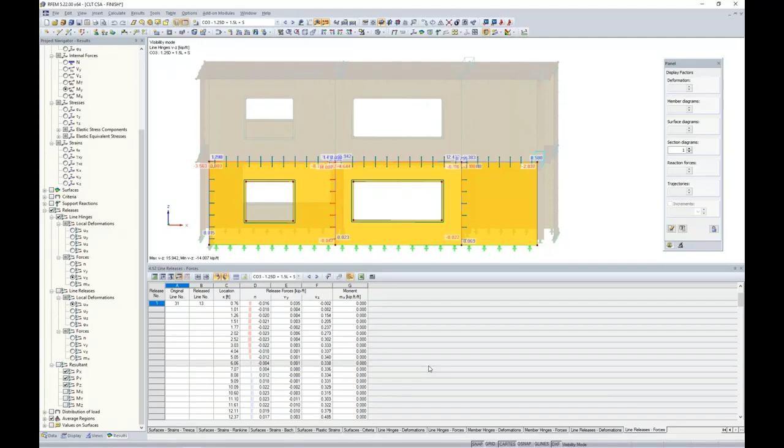Okay, so that really sums up basic CLT design according to the CSA O86 that we recently added into the program. We'll go ahead and sum up today's webinar with a little more information. I know that was quite a bit of information on both RF-LAMINATE as well as our main program RFEM.